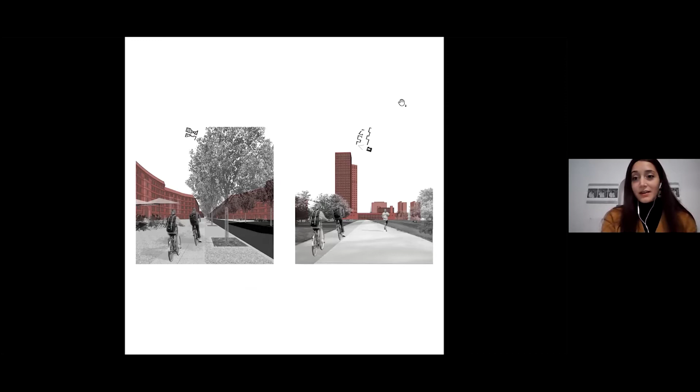The urban project is made of basic units, plus a public element in the center, which is a solitary building. The two parks, East and West, are now linked because the railway tracks run underground before the new Bülowstrasse, the new east-west axis, which is almost completely a pedestrian area, linking the two districts, Schöneberg and Kreuzberg.

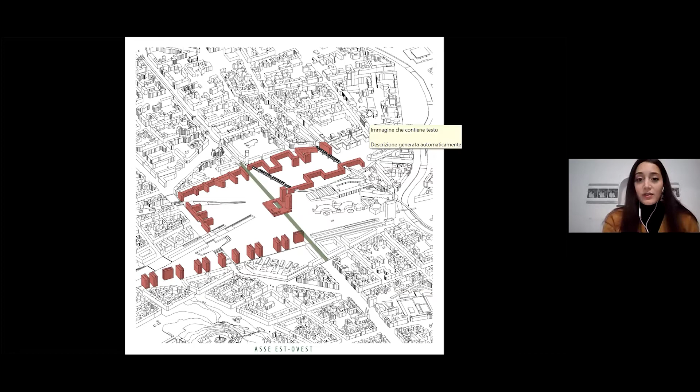I defined two features for the park, more densified and less densified areas, and also two kinds of paths and new accesses to the park.

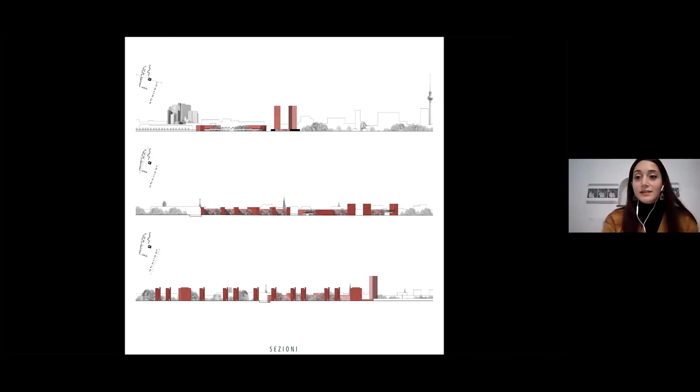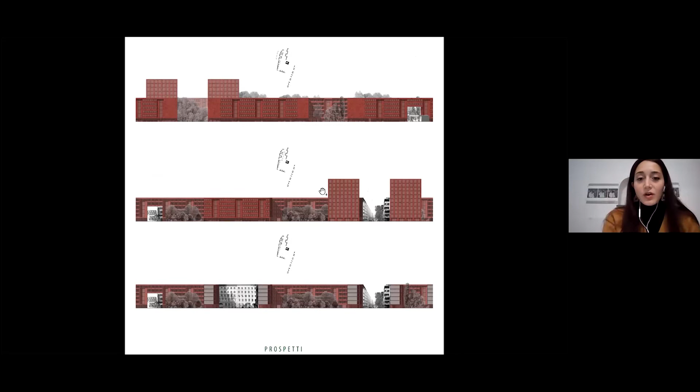The densification of the area is made by linear elements and towers. There is a strong densification of the area, as is a must for the new city, but there are still strong relationships with nature. The open courts of the buildings have nature inside them.

One of the features that exists today in the park is the infrastructure going through it, and this remains part of the project.

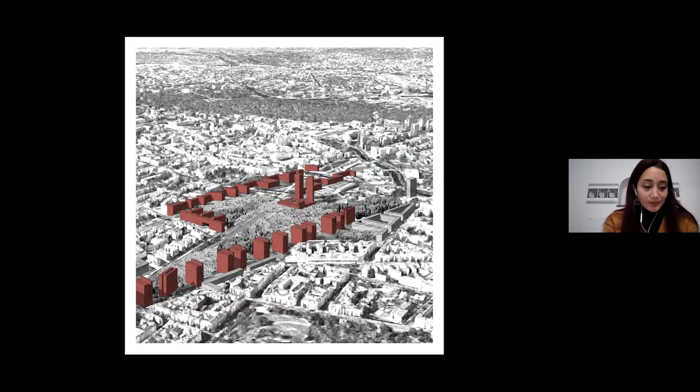The basic units start from redent elements, which give me a filter between the street, the new neighborhood street on the border, and then entering through big openings into the public park, also creating big courts open on one edge.

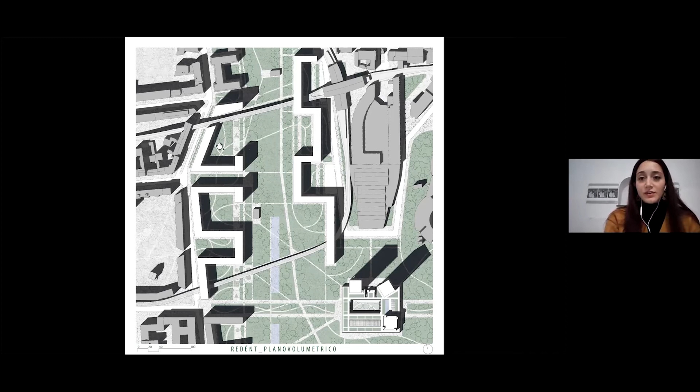There is a difference between the inside, which is private, and the outside, which is public. This filter is made by sporting camps and playground areas.

A point of view on the new pedestrian area, the new Bülowstrasse in the center, facing the covered square, and also a view of the infrastructure going through the buildings.

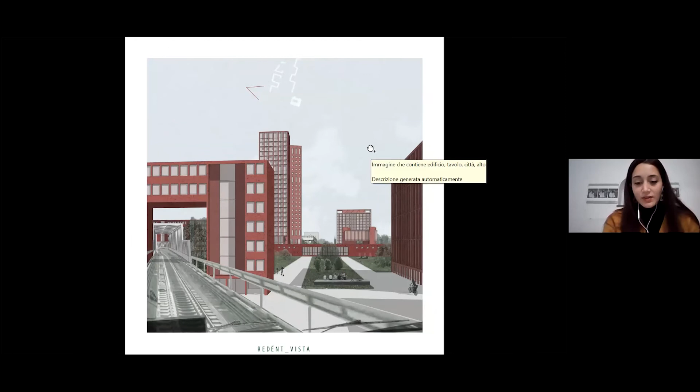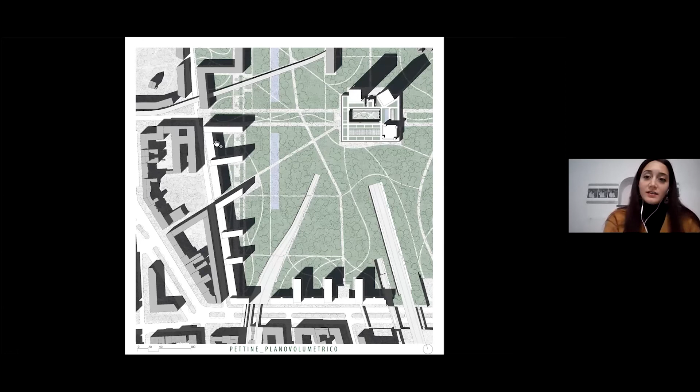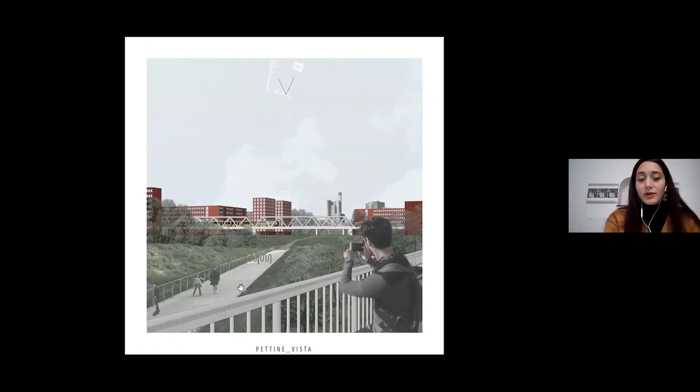Almost the same for the second basic units: open courts with private garden areas, then the public park outside. There is the possibility to enter from the south, from Yorkstrasse, which is now four meters below the actual park level, leading to a ramp going inside the park.

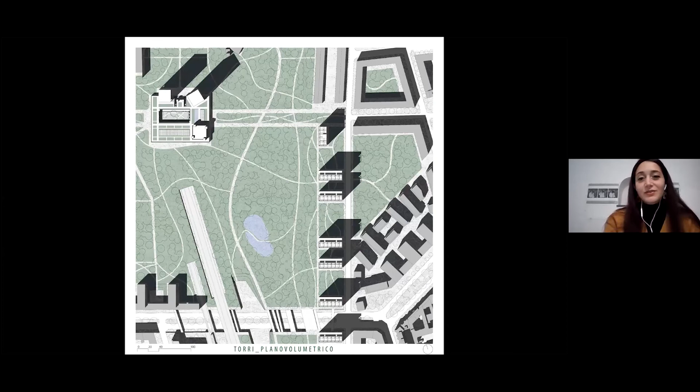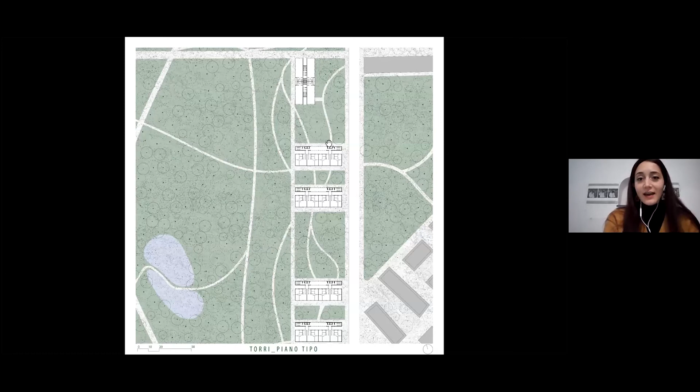Then the towers, the last basic units. Towers allow a strong densification on this side of the park, but without defining a border. Indeed, nature goes completely through them, and this nature invites people to enter the park.

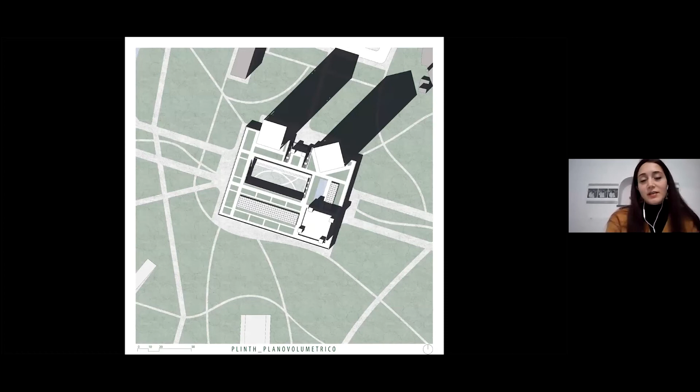In the end, the solitary building inside the nature is the new centrality of the park, as I said before, and it is called the Plinth. A plinth is just a basement intersected by two towers, with a suspended hall on top for exhibitions.

On the ground floor, the common walker through the park can continue his walk by going into the building and then continuing out, or stay in the building in the restaurant and commercial areas in the northern part, or go elsewhere in the city in the southern part.

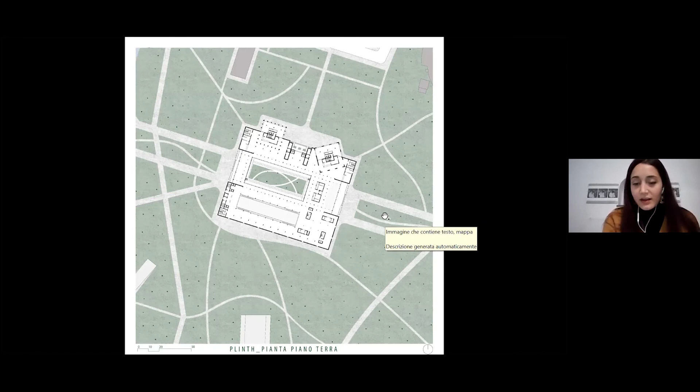There is a new railway station underground, so this is also the occasion to have a new infrastructure link into the park, right in the middle.

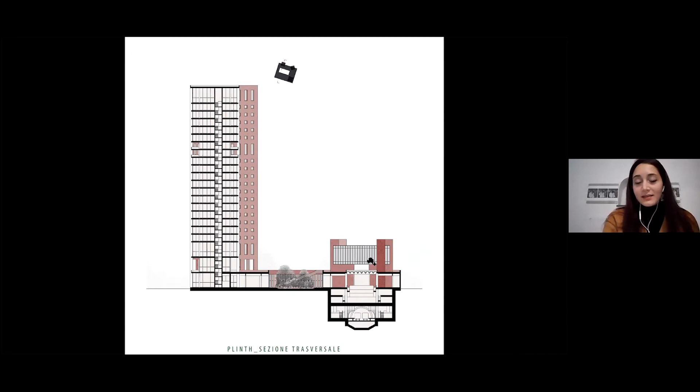On top, as I said before, there is a completely light element suspended on the plinth, on the basement.

In a technical section, we can see two different technological methods of construction: a more masonry basement and a light steel element, which is the exhibition hall.

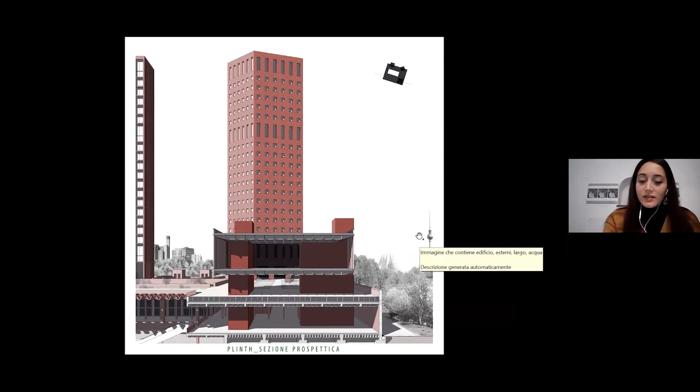A point of view on the new centrality of the park shows these two towers for offices, which face the park. There is also the opportunity for park users to go to the top of the plinth, the basement, and have a special point of view on the park.

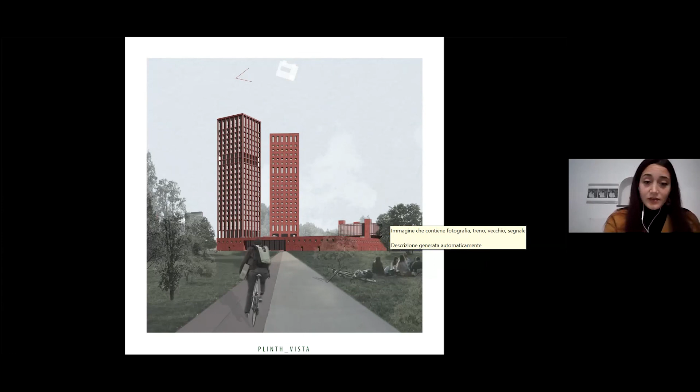This was the aim of the project. In conclusion, I think the project is a contribution to the recent debate on the contemporary city and what it is becoming in the future, and also addresses the need to re-establish a relationship between architecture and nature. Thank you.